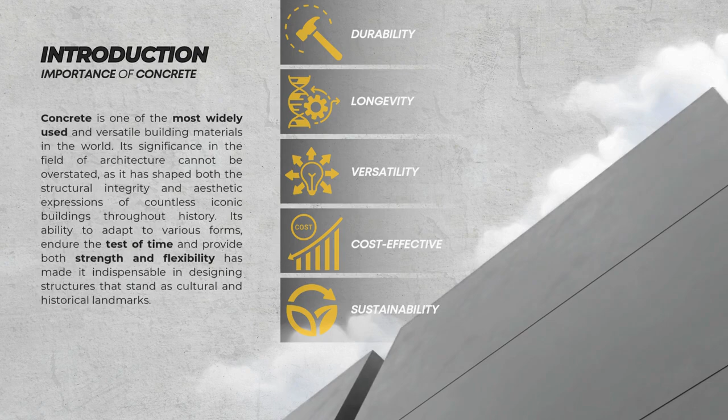Concrete is one of the most commonly used and flexible materials in construction. It has played a huge role in shaping both the strength and appearance of many famous buildings throughout history. Its ability to be molded into different shapes, last for a long time, and offer both strength and flexibility makes it important for creating structures that become cultural and historical landmarks. In this presentation, we will look at the different ways concrete is used in architectural design, especially in important buildings in the Philippines, Southeast Asia, and other parts of Asia.

Concrete has been a fundamental material in Philippine architecture, evolving from early colonial infrastructure to modernist masterpieces. Over time, its use expanded from basic structures to iconic government buildings, schools, and residential projects, reflecting the nation's growing industrialization and modernity. Today, concrete continues to be a dominant material valued not only for its durability and versatility.

The Cultural Center of the Philippines, or CCP, is designed in the brutalist style, featuring bold, raw concrete forms and a monumental sculptural aesthetic. The key designs include a grand staircase, cantilevered roof, and column-free interior space that emphasize openness and flexibility, reflecting both modernity and the cultural significance of the building.

The CCP utilizes reinforced concrete in its structural system, with large cantilevered beams and columns creating a sense of openness and fluidity in its interior spaces. Concrete slabs and arches support the building's expansive volume, while the use of raw concrete emphasizes its strength and permanence, aligning with the modernist vision of the structure.

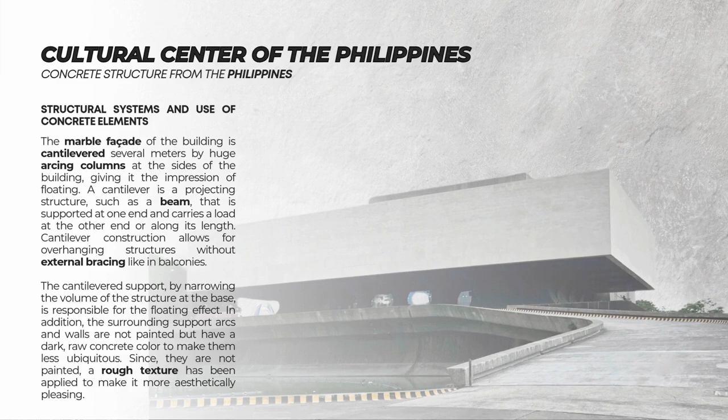The CCP stands as a symbol of the Philippines' commitment to preserving and promoting its cultural heritage through the arts, becoming a focal point for national expression and creativity. Architecturally, it marks a significant moment in the post-colonial period, reflecting the country's desire for modernization while also honoring its cultural identity through its bold, brutalist design.

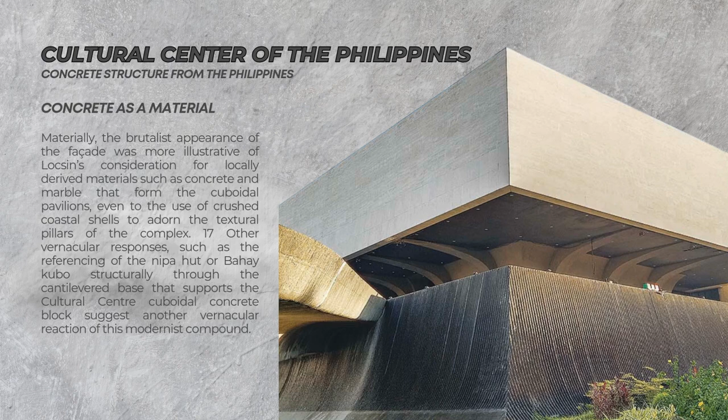Concrete plays a central role in the Cultural Center of the Philippines, offering durability, adaptability, and artistic versatility. Its use allows for the creation of bold, massive forms and expansive open spaces, aligning with CCP's monumental design while showcasing concrete as a symbol of strength and modernity.

The environmental influences on the CCP are equally significant. Located in the heart of Manila, the Cultural Center is surrounded by lush landscaping, including the lagoon that encircles the building. This natural setting plays a crucial role in Locsin's design, as the building appears to float above the water, creating a sense of tranquility and connection to nature. The reflected surface of the lagoon enhances the building's visual impact, making it seem like an integral part of the environment. Additionally, the elevated podium allows airflow, providing natural ventilation.

The absence of many windows limits outer light exposure, which is replaced by comfortable lighting that accentuates the reflective onyx floor tiles, while the cantilevered roofs offer shade and protect the structure from the intense heat of the tropical climate. The integration of these environmental factors into the design not only enhances CCP's functionality but also fosters a harmonious relationship between the built and natural environment.

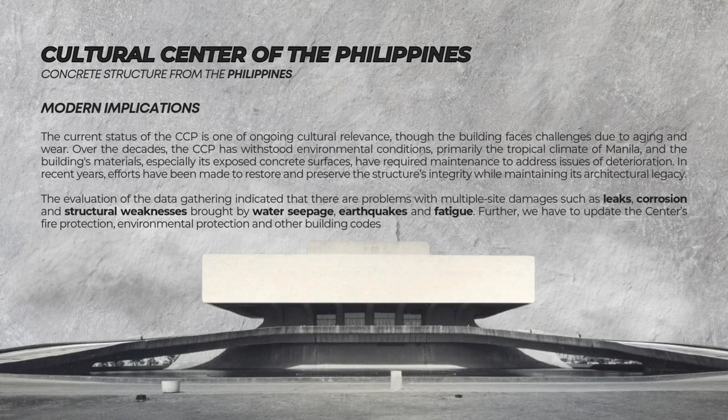Modern architects and engineers continue to innovate concrete use by incorporating sustainable practices, such as using recycled materials and energy-efficient systems. In heritage-sensitive projects like the restoration of the CCP, architects balance preservation with contemporary needs, demonstrating how concrete can be adapted to both honor tradition and meet modern environmental standards.

For Southeast Asia, the National Olympic Stadium in Phnom Penh was constructed from 1963 to 1964 and designed by Vann Molyvann, Cambodia's leading architect. Built to host the 1963 Southeast Asian Games, but later cancelled, the stadium symbolizes Cambodia's modernization efforts post-independence.

It served various roles over the decades, including a venue for sports, political events, and cultural activities, reflecting its historical and social significance. For the case study, architectural style and key design elements, the stadium embodies New Khmer architecture, merging traditional Cambodian elements with modernist principles.

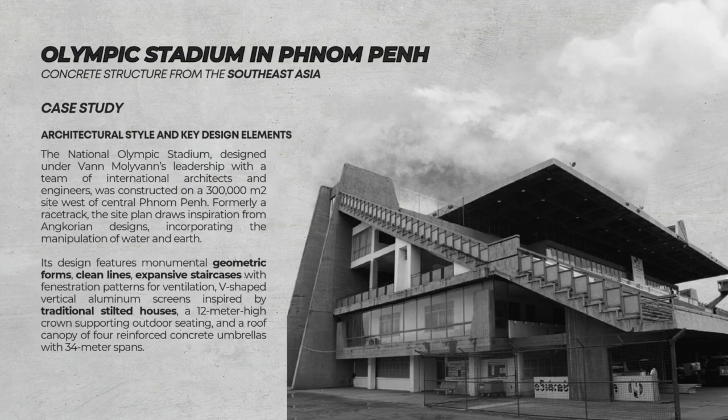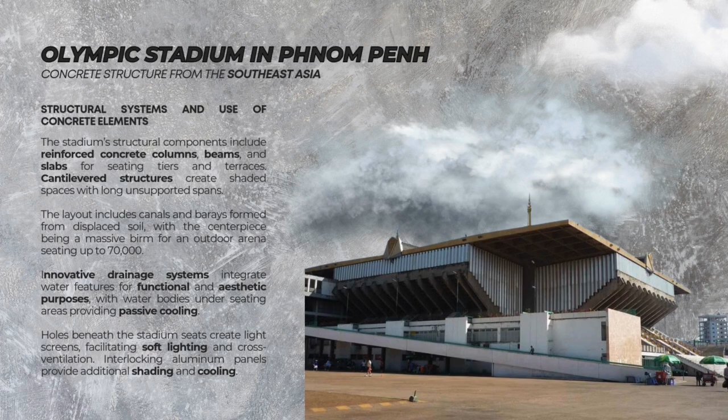For these structural systems and concrete elements, reinforced concrete was extensively used for columns, beams, slabs, and cantilevered roofs. This innovative drainage system cools sitting areas using water bodies beneath. Light screens and aluminum panels enhance ventilation and shading, demonstrating advanced structural design.

For cultural and historical significance, the stadium is a cultural landmark, hosting events like the 1966 GANEFO Games and independence celebrations. Despite threats of redevelopment, it remains a symbol of national pride and resilience, preserving Cambodia's architectural and historical heritage.

Concrete as a material: its durability and versatility allowed for the stadium's bold designs and functionality. It adapted to Cambodia's humid climate, providing strength and sustainability. Its ability to blend traditional motifs with modern construction underscores its artistic and structural value.

Cultural and environmental influences: the design reflects Cambodia's culture and tropical climate, emphasizing natural ventilation, passive cooling, and flood management. Traditional materials and local techniques enhance its cultural and environmental integration.

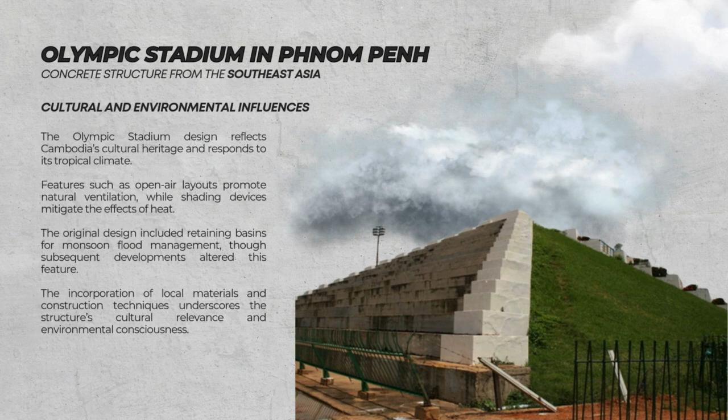For comparative analysis, compared to structures like Singapore's Marina Bay Sands, the stadium focuses on cultural significance over luxury. Both use concrete innovatively, but the stadium prioritizes practicality and heritage, contrasting with Marina Bay Sands' emphasis on engineering spectacle.

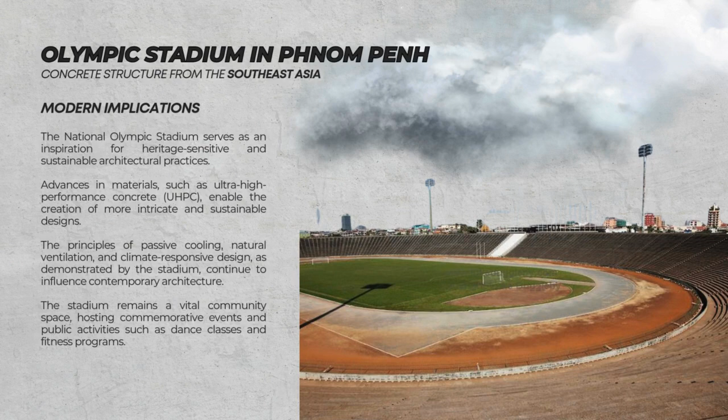Despite redevelopment challenges, the stadium remains a community hub, hosting commemorations and public activities like dance classes. Its original features, such as the drainage system and passive cooling techniques, continue to be admired and studied.

And that will be all for Southeast Asia, the Olympic Stadium in Phnom Penh, Cambodia.

Historical overview: concrete technology was introduced to China in the late 19th century, revolutionizing traditional construction, which had relied on timber and bricks. Influenced by Western methods, concrete enabled modern structural design and durability.

It was valued for its strength, versatility, and affordability, and by the 1980s, economic expansion encouraged its usage in innovative public and commercial structures.

Architectural style and key design elements: designed by Wang Shu, the Ningbo Museum seamlessly blends traditional Chinese architecture with modern design. Its facade uses recycled materials from demolished villages, emphasizing sustainability and cultural heritage. The structure's boat and mountain-inspired form reflects Ningbo's maritime history and landscape.

Structural systems and use of concrete elements: the Ningbo Historic Museum's core is made of reinforced concrete, providing structural strength for its expansive design. The facades use the Wapan technique, incorporating recycled tiles and bricks, adding both strength and cultural significance. Concrete beams, slabs, and bamboo formwork are used in specific areas, creating textured impressions that honor traditional craftsmanship.

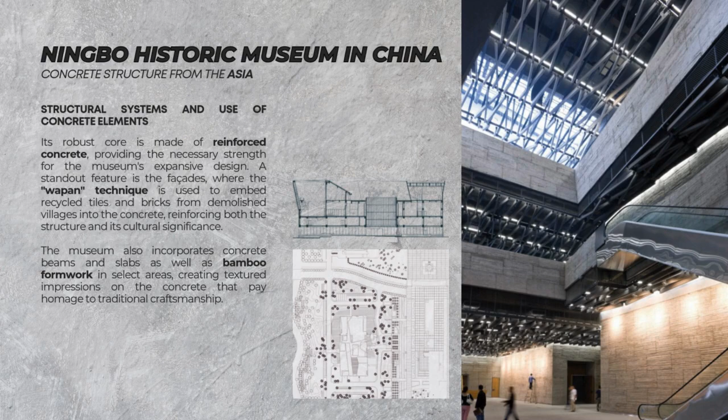Cultural and historical significance of the structure: the Ningbo Historic Museum blends sustainable design with cultural preservation by using recycled materials to honor the city's heritage. Its mountain-inspired form and textured walls reflect traditional Chinese values of harmony with nature.

The museum incorporates the Wapan technique, repurposing materials from demolished villages to connect the past with the present, offering a unique sense of place while preserving local history. This fusion of traditional and modern architecture highlights resilience and cultural continuity.

Concrete as a material: concrete plays a crucial role in the Ningbo Historic Museum, offering durability for long-lasting structures essential in heritage-sensitive projects. Wang Shu integrates reclaimed materials, including bricks and tiles from various dynasties, preserving the region's history.

Cultural and environmental influences: the Ningbo Historic Museum's design reflects local culture and geography, influenced by the city's maritime history and masonry traditions. The use of recycled bricks and tiles connects the structure to its past, while the climate informs its focus on natural ventilation and cooling.